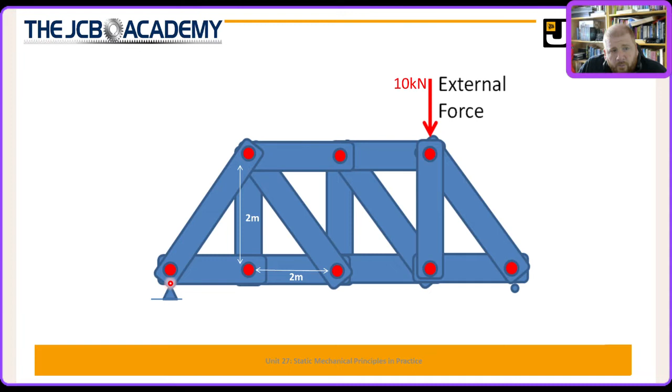Because we have a pin joint here, this part of the truss can't move horizontally or vertically. Therefore, there are two reaction forces: one in the horizontal direction, R1x, and one in the vertical direction, R1y.

However, at this end of the truss, it's a roller bearing. It can move horizontally, but it's being supported vertically. Therefore, there's only one reaction force at that end, which is R2 in the y direction.

These reaction forces are the first thing we have to calculate. These three reaction forces are the first things we have to calculate before we can go into any more detailed truss analysis. So we're going to move on and look at how we do this.

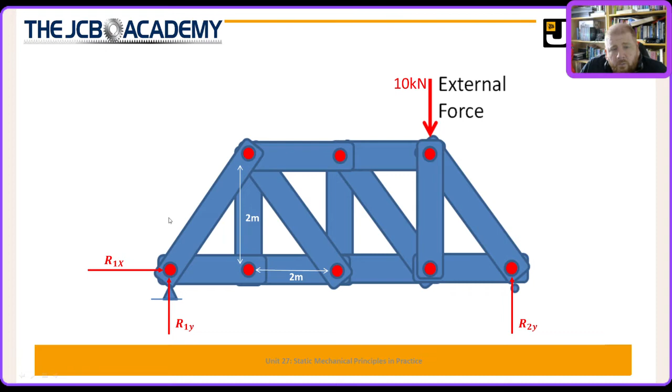The simplest way is to now take the whole truss as one solid object. I've kept the vague shape of it - that's what we tend to do when we do this.

Put the dimensions on. So there are 4 beams horizontally between this end and this end, so 4 times 2 meters is 8 meters. And there are 3 beams from this end to where the 10 kilonewton force is acting, so that is 6 meters from this end.

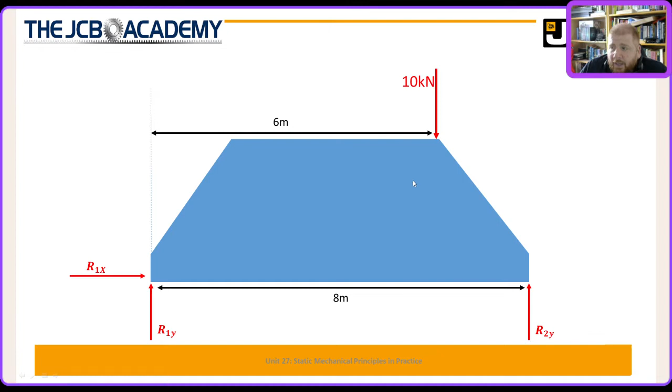So now we've got our measures, what we're going to do is look at our 3 equations of equilibrium. Statics is all about things not moving. So if we look, put our reaction forces in, we're now going to equate these forces and see how we go.

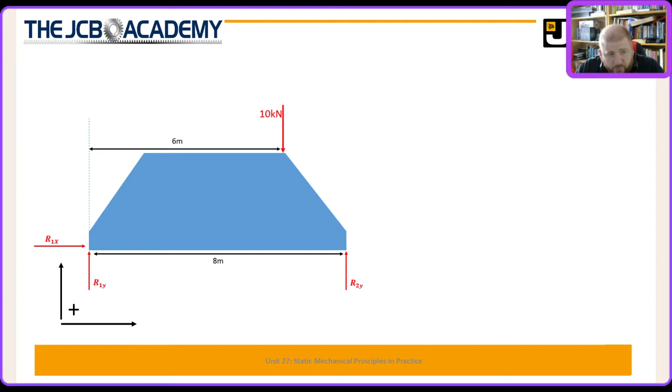So when equating forces, we need a convention for our signs. I tend to always take my sign convention as being up is positive and right is positive. That ties in with how we draw a graph in England especially - that top right quadrant of a graph is our positive quadrant.

The other thing I also do, which I've not drawn on here but is a convention I use, is that anti-clockwise moments are positive. That comes from my background in robotics.

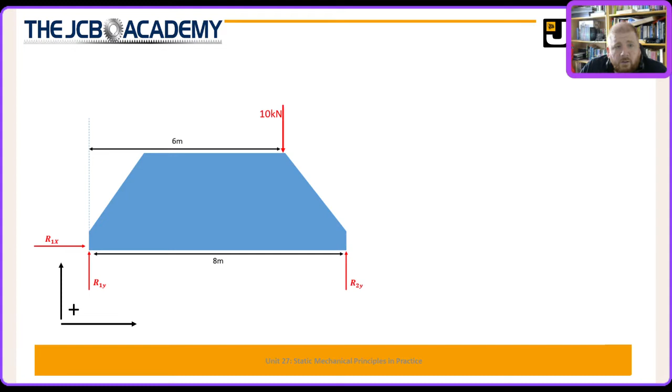So if we look, there are 3 formulae that we need to remember when we're calculating statics: the sum of all horizontal forces, sigma Fx, is equal to 0, and the sum of all vertical forces, sum of Fy, is equal to 0.

If we look at our horizontal forces, we'll just sort this out now. We have one horizontal force here, R1x, and no other horizontal forces. If this external force were acting at an angle, it may create a horizontal force, meaning we get a horizontal reaction force. But in this example, R1x is pushing to the right, and there are no other forces pushing to the left, so R1x is equal to 0.

And you should, if you're doing the BTEC level 3, expect this to be the case. It's a very, very harsh centre that would ever give you something where R1x equals anything but 0.

Back to where I was. The sum of forces in the y direction is also equal to 0, with up as positive. That means R1y and R2y must balance a 10 kilonewton force pressing down. So R1y plus R2y minus 10k equals 0, which simplifies to R1y plus R2y equals 10k. There's nothing else we can do with that yet, because we don't know what R1y or R2y is.

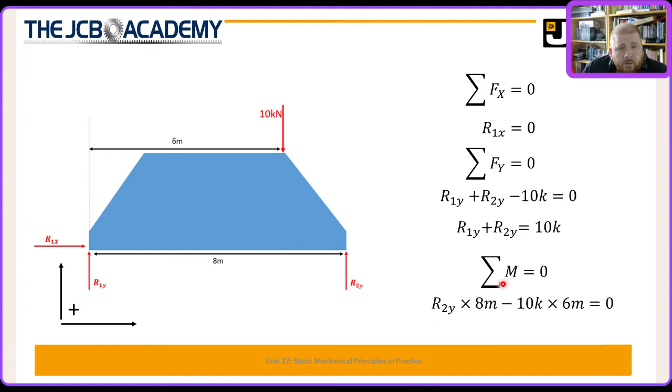What we've got is R2y multiplied by 8 meters from our pivot point, minus 10k, because it's trying to turn it. R2 is turning it anti-clockwise, so it's positive, and the 10k force is turning it clockwise, so it's negative. So R2y times 8 meters minus 10k multiplied by 6 meters is equal to 0, because all of our forces equal 0.

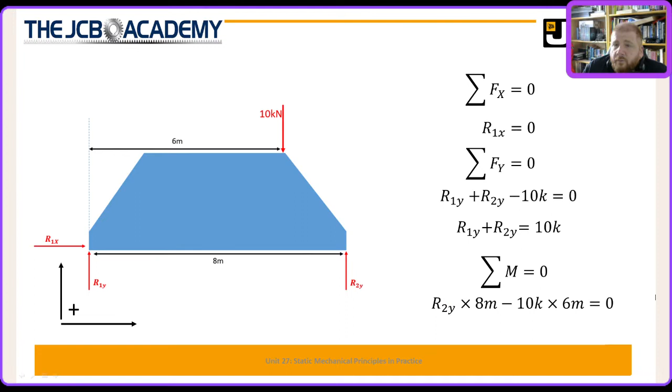Happy with that so far. What we'll see now is we'll take these two forces, and we're going to take this bottom equation here.

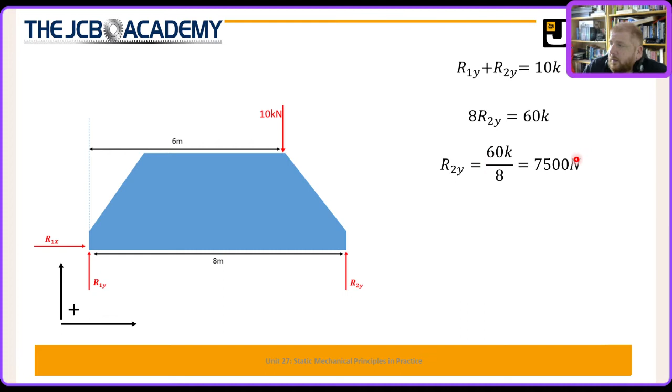8 times R2y is equal to 60k. Hopefully that's a simple rearrangement for you guys: R2y is 60k divided by 8, which is 7,500 newtons, or 7.5 kilonewtons.

If we then take that 7.5 kilonewtons and put it back into the first equation, we see that R1y plus R2y is 10k. R1y plus 7,500 is 10k, which means R1y is 10k minus 7.5k, giving us 2.5 kilonewtons. That gives us our reaction forces for this truss.

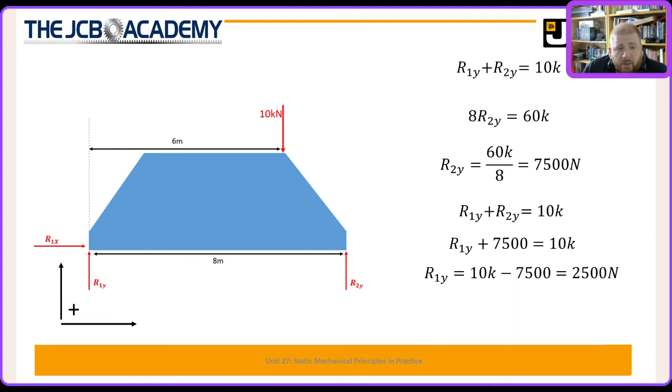So we can draw the truss with its reaction forces sitting there. Those reaction forces are calculated exactly the same way as you would for a simply supported beam.

Now we've got 8 different joints to analyse, with 13 beams, which means there's going to be 8 different sets of 2 equations for each joint, sorry, not beam.

So what we're going to do to simplify is to label our joints. Personally, I tend to start at one point and go clockwise, but you're free to label them how you want. I start in the bottom left with A, and then just label them all the way around to H in a clockwise motion. That's done, so now we know what the joints are called.

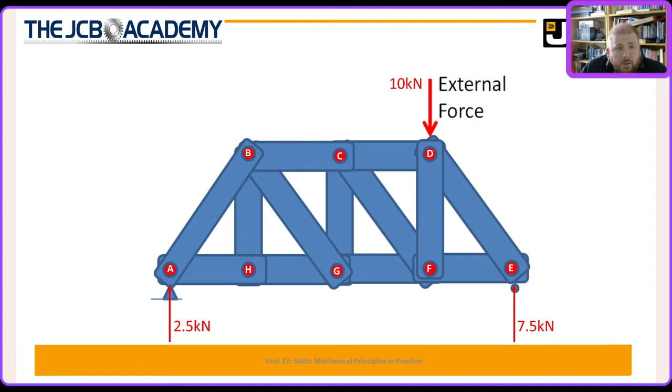We're going to add the forces. To do this, I've slightly redrawn the truss a bit bigger. This diagram was one I drew a few years ago and didn't allow an awful lot of modification. This version is a bit more user friendly, shall we say. So here's my truss, exactly the same design, just slightly bigger, easier for us to see.

We're going to take the beams out of the diagram and replace them with tensile forces, assuming every force is tensile. Now when we look at that, we take the force between point A and point B. We're going to remove that beam and add an inward pointing force we've called AB. So a tensile force on that beam creates an internal pull at joint A.

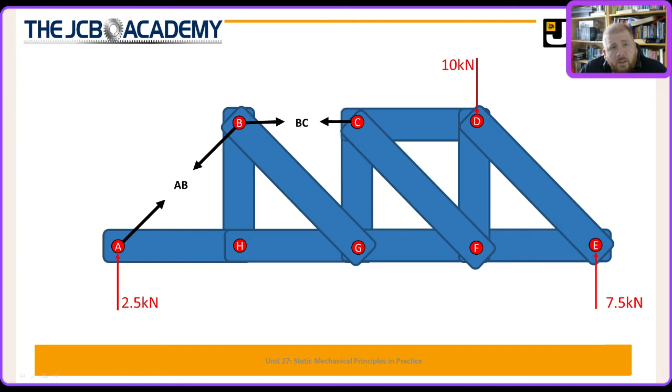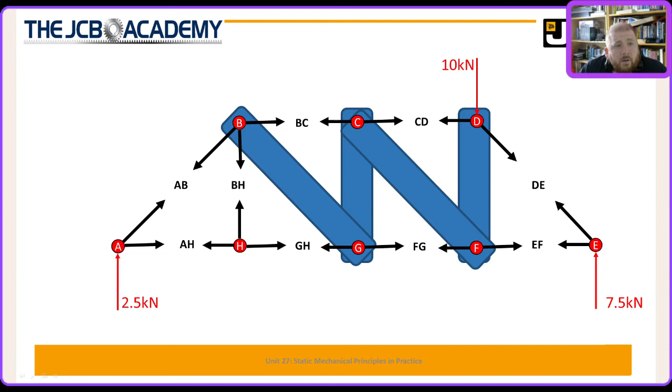And we just go around again and do exactly the same thing. So we replace BC, CD, DE, EF, FG, and so on, all the way around until we have a still very complicated looking free body diagram. And it's at this point you have all freedom. We're going to pick a joint, ignore absolutely everything else within that truss, and use that point to determine the forces acting on it. But there is one rule.

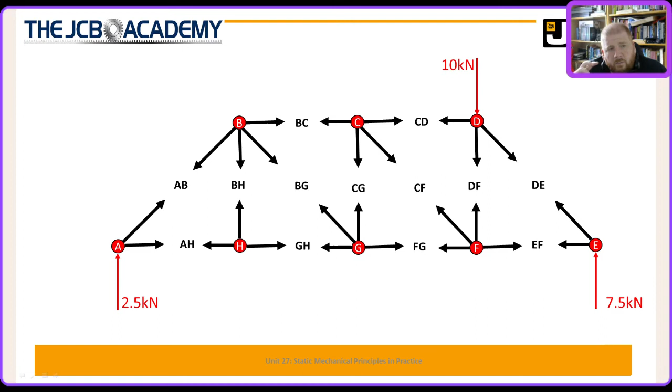We have two equations per joint: the forces acting horizontally and the forces acting vertically. So if we have more than two unknowns, we would need more than two equations. So we can only use the method of joints where we know all but two of the forces acting on a joint.

For instance, if we look here at point B, it has got AB, BH, BC and BG all acting upon it, and we don't currently know what any of them are, so we can't start at point B.

If we look at point E, we have a 7.5 kilonewton reaction force, force DE, and force EF. There's two unknown forces, so we could use point E. However, I look at point A, and point A is in the same situation: 2.5 kilonewton reaction force, force AB and force AH.

When we're doing our calculations, we're going to use the same conventions all the time, and I'll bring that up in a minute. If our forces become negative, the easiest way is to use the name of the force, rearrange the equation, and then put the forces in, because then we don't lose minus signs. It will make sense in a moment as we go through this.

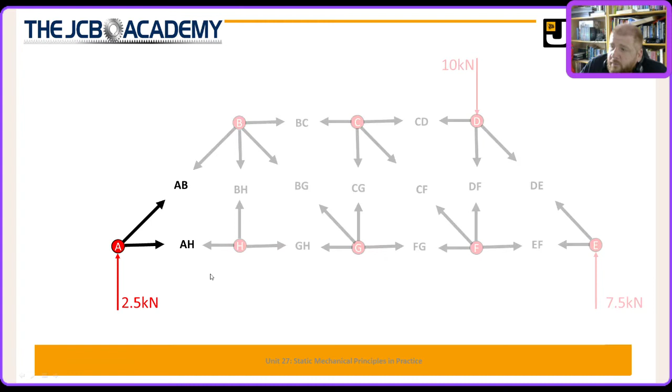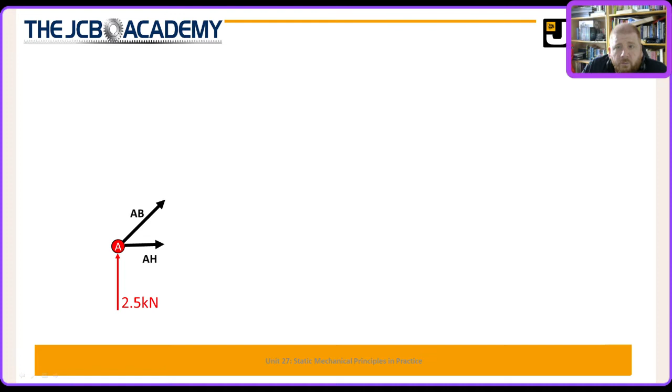So we're going to pick point A first. I'm going to get rid of everything else and bring up my free body diagram, and this is all we would sketch. Point A is an individual point force. Now let's add in our sign convention, which will be there in a moment. There it is. Now we're going to equate horizontal forces, then equate vertical forces.

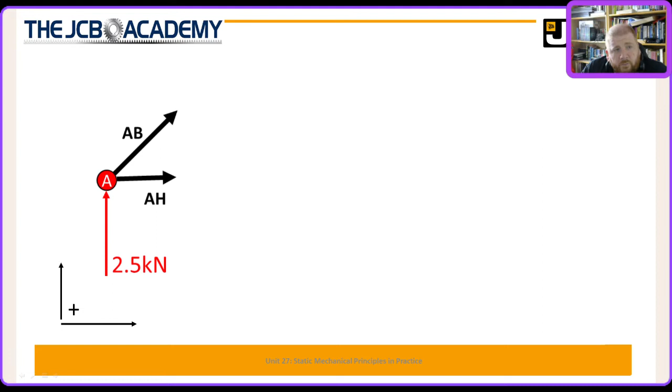So, sum of forces in the x direction is equal to 0. This is how I tend to do it on a page as well: you'll see I'll have split my page down the middle, done x, and I'll do y in this part of the screen here. You'll see it in a moment.

So if we look at this, sum of forces in the x direction: we have got force AH, which is horizontal and pointing to the right. We also have the horizontal component of force AB, which is acting at 45 degrees to the horizontal. If we remember our rules of right angled triangles, then the horizontal component of a force is the hypotenuse multiplied by the cosine of the angle.

The vertical component of the force is the hypotenuse multiplied by the sine of the angle. Those are two rules that are very important to remember for this analysis, they'll come up all the time. Again, we can't do anything here because we don't know what AB is, we don't know what AH is. We've got two unknowns, we've got one equation.

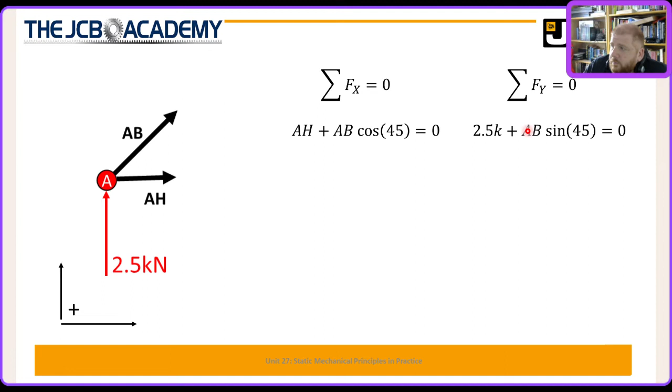However, if we look at the vertical forces, sum of the forces in the y direction: 2.5 kilonewtons is pointing upwards here, plus the vertical component of AB, which is also pointing upwards, so it's positive, which is AB times the sine of 45, is equal to 0.

Now we've got one unknown in this equation, so we keep working. We rearrange this, we get that AB times sine 45 is minus 2,500, and AB is minus 2,500 over sine 45, which gives us our first force. Force AB is minus 3.54 kilonewtons. Minus because this is not a tensile force, this is a compressive force. That's what that minus sign means. But for the purposes of our calculation right now, we're just going to put minus 3.54 into our table of results. We'll worry about what's compressive and tensile at the end.

Bringing it back to our forces in the x direction, we now know what AB is: AB is minus 3.54 kilonewtons. Therefore AH is minus AB cos 45, and so AH is minus minus 3.54k cos 45. This is why it's important to get this sign right before we put our numbers in, because minus minus gives us plus 2.5 kilonewtons for our force AH.

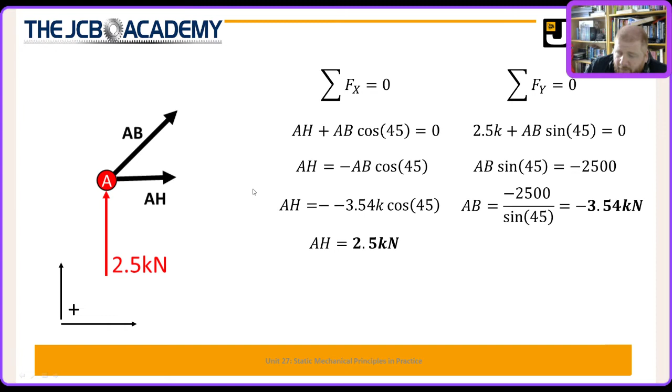Going to our truss, those are those two forces calculated, so we can go back to our truss, and again this is how I would be doing it for you guys. Have the truss drawn out, get yourselves a table of results. So we've now got AB and AH. You'll note these are all the forces that I'm expecting to see within this truss, and I've worked two of them out already. If you want, you can then rub out AB and replace that with the force value.

I'm doing this purely so you can see how we build up these forces. Generally I would just leave the table at the end, it's up to you. Okay, so now we've got to work out which one we're going to do next.

If we look at point B, we still have three unknown forces. Point E we could do, but it doesn't really get us anywhere. However, if we do point H, then we clear this force out on point B and we're left with two. So the principle is: do point A, then go to point H, up to point B, and we should then be able to step ourselves up - diagonally down, up, diagonally down, up, and back down. So we're going to do point H next.

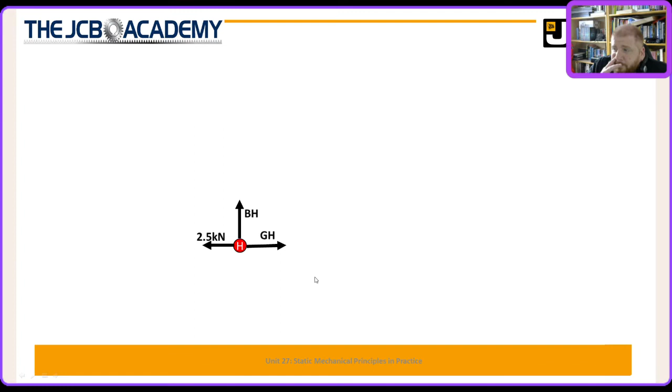So let's have a look at point H. Bring those forces in, just for us so we can see what's going on. And don't forget my sign convention - I'll start not putting that sign convention on the slides in a bit.

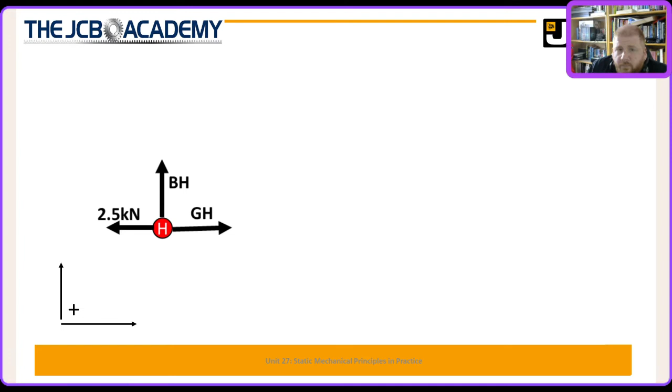Sum of forces in the x direction is equal to 0. GH is positive due to our convention down here. AH is negative due to our convention down here - this is AH, remember, our 2.5 kilonewton force. So GH is equal to AH, which means GH is also equal to 2.5 kilonewtons. Nice, quick calculation.

Those bright sparks might be looking at BH thinking, I know what that is. This is what we call a zero force member. If you see two forces directly opposing each other and then a third force at 90 degrees to it, then you know that is a zero force member.

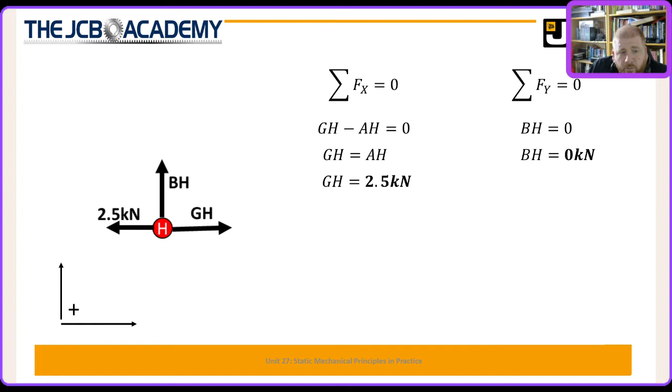BH is upwards and positive. There are no other vertical forces in this member at this point. Therefore, BH is equal to 0 kilonewtons - what we call a zero force member. So point H is nice and quick.

Done. We can come in, replace BH and GH with their forces, and again, I'm going to replace them on the diagram. We can't exactly delete that member off the diagram - even though it's 0 kilonewtons, we can't delete it because the member is there. So we've got to acknowledge it's there, but we call it a zero force member. For instance, if BC were to break, then this would start taking some force, probably.

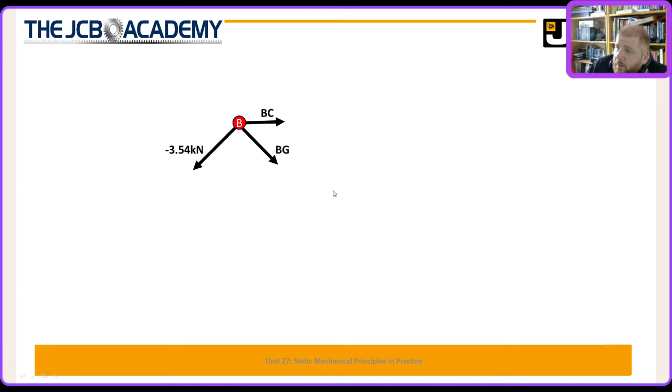So we've done H, we've done A, got 4 forces already. Now if we look at point B, we know what this force is, we know what this force is, and we're left with 2 unknown forces. So I'm going to do point B next, work our way through it. Just simplify our diagram a little bit.

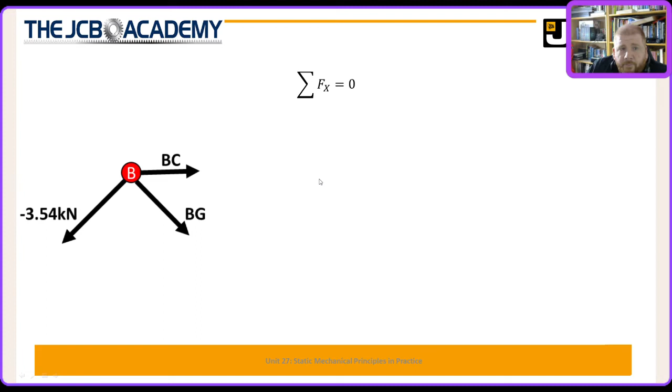Sum of forces in the X direction - and again, here's where we're going to get slightly bogged down with signs. BC horizontal, pointing to the right, positive, plus the horizontal component of BG, which is BG cos 45, also horizontal and pointing to the right, minus, because it's going to be pointing to the left, the horizontal component of AB, which is our minus 3.54 kilonewtons from our previous calculation. So we have to look at this, rearrange this - yeah, there's nothing we can do because we've still got 2 unknowns.

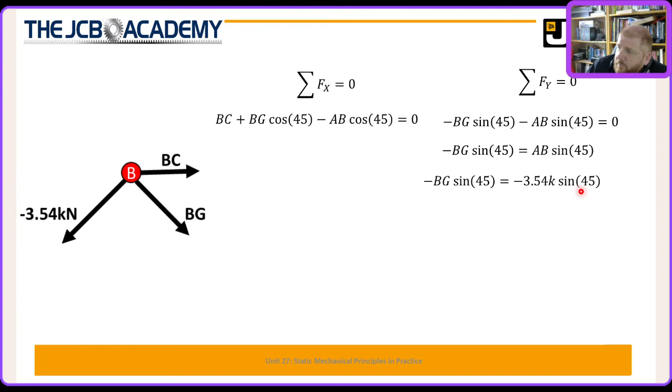So we have to come back to our vertical forces again, Fy. You can see that minus BG sine 45, vertical component of BG, minus - because these forces are pointing down, that's why they're negative - so minus BG sine 45 minus AB sine 45 is equal to 0. That means minus BG sine 45 is equal to AB sine 45. Minus BG sine 45 is equal to minus 3.54, that's our AB sine 45. Minus BG is minus 3.54 kilonewtons, so BG is 3.54 kilonewtons.

Lots of minuses in this one, be careful. This is a tensile force, however it is of equal and opposite magnitude to AB.

Now we know BG and we know AB, we can plug our values in here, and again watch out for this minus - okay, that will become a plus. So BC plus 3.54 cos 45 plus 3.54 cos 45. BC plus 2.5k plus 2.5k. BC is minus 5 kilonewtons. You will be a marvel at right angled triangles by the time we finish this truss.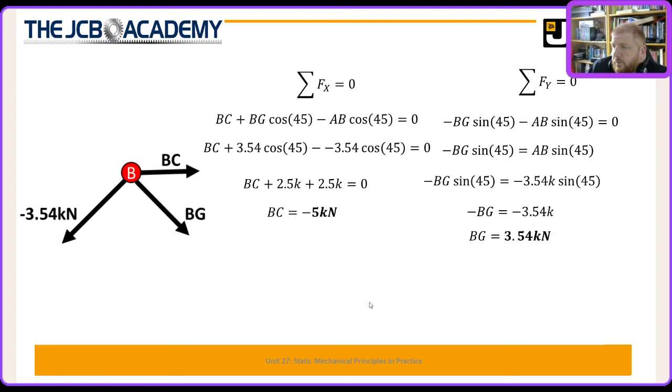So we've now got what BG is, we've got BC's. You'll note I just even deleted BH - there was no force there, so I just took it off to make the diagram easier. We can do that bit on our single point force, we can't do it on the overall truss. And so we're back here - we've now got BC, and we've got BG.

BG is 3.54 kilonewtons, BC is minus 5 kilonewtons. So we're basically halfway through this truss already, nearly. 1, 2, 3, 4, 5, 6, 7 more to work out. We've worked out 1, 2, 3, 4, 5, 6, we've got 7 more to work out.

So again, we're going to look, and point C still has 3 unknown forces on it. But point G, we know this force, we know this force, and we've got 2 unknown ones. Therefore, we're going to do point G next. So let's have a look at point G.

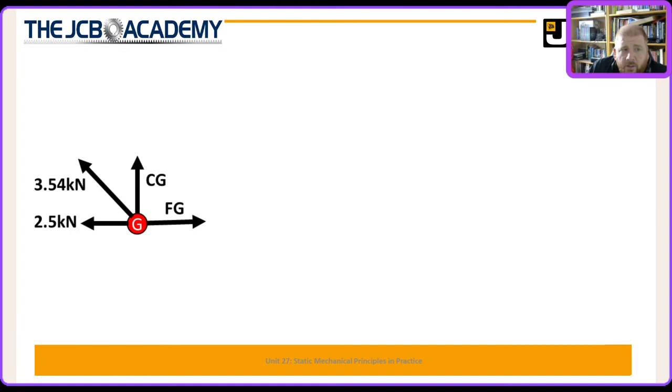Let that come in. We're keeping the same convention, so I've not bothered reiterating it. Sum of forces in the x direction. FG is positive and pointing to the right. 2.5 kilonewtons, that is GH, pointing to the left, so that will be negative. And we'll have the horizontal component of our 3.54 kilonewton BG force here. So we've got FG minus GH minus BG cos 45 is 0.

Plug our numbers in there. 3.54 cos 45 is 2.5 kilonewtons. FG minus 2.5k minus 2.5k is 0. So FG is 5 kilonewtons.

Sum of forces in the y direction. Vertical pointing upwards, CG, so it's positive here. Vertical component of 3.54 kilonewtons on BG is BG sine 45. So CG plus 3.54k sine 45 is 0. 3.54k sine 45 is 2.5k. You may be noticing that cos 45 and sine 45 are the same value. So CG is minus 2.5 kilonewtons.

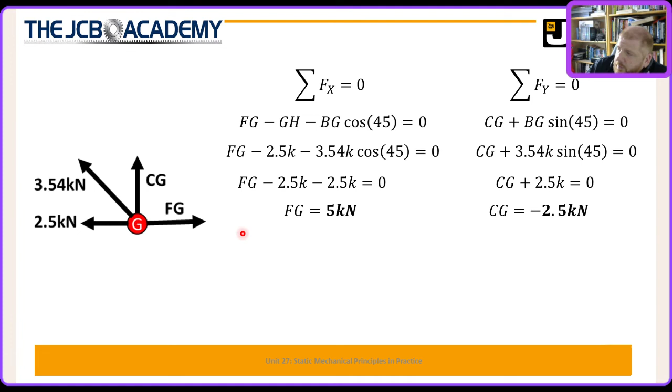So we've got CG and we've got FG from that calculation. Again, now we pop back to our truss, pop those values in the required slots, and I'm just going to replace the forces as we have done already. Okay, so now I'm going to go up, keeping this going, up to point C, where we know 2 of the forces, we don't know the other 2.

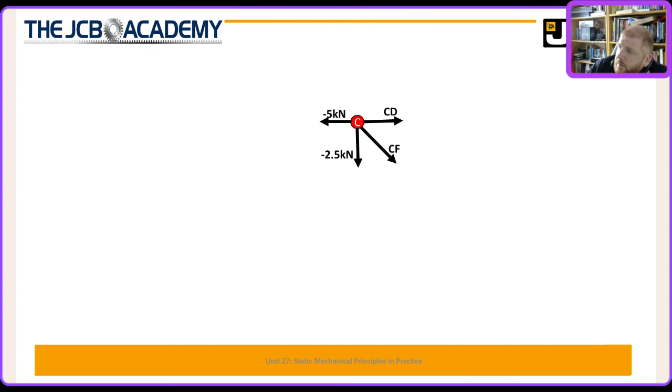So let's focus on this one. Again, this one's slightly tricky, but it's not too horrendous. Forces in the x direction, once again. So we've got CD, horizontal, pointing to the right.

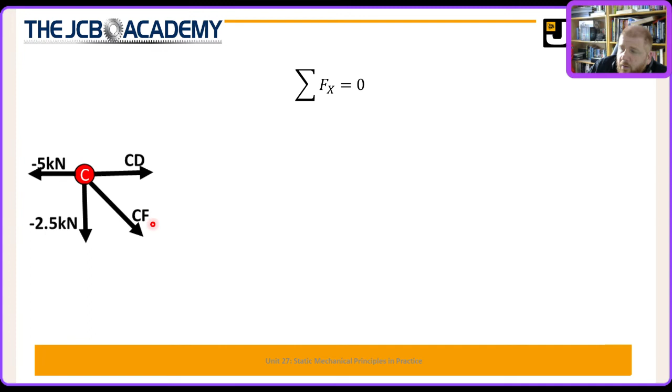We've got what's that one? BC, minus 5 kilonewtons, horizontal, pointing to the left. And we've got the horizontal component of CF, which will also be pointing to the right. So I get CD plus CF times cos of 45, minus 5k because it's pointing behind us and is minus 5 kilonewtons. Again, we can't do anything with that because we don't know what CF is and we don't know what CD is yet.

So we need to go to our vertical forces. Both are pointing down, so we get minus CG, which is this minus 2.5 kilonewton force, minus the vertical component in CF because it's pointing downwards. We have to go to the right and then down to get to this point. So we've got minus CG minus CF sine 45. That means minus minus 2.5 kilonewtons is equal to CF sine 45. Plus 2.5 kilonewtons over sine 45 is CF, and that is 3.54 kilonewtons.

Now we have CF. We come into this bank here, put our numbers in. You'll note I've taken here, I've taken my minus and minus and made it a plus. 3.54 kilonewtons, which we've just calculated here. Rearrange that, and we get that CD plus 2.5k plus 5k is 0, so CD is minus 7.5 kilonewtons.

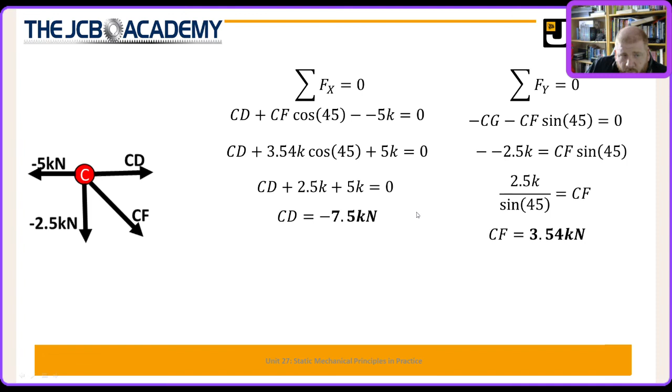Next two forces done. So we go back and we plug those in, and you start seeing, oh, we've only got 3 forces left to get. Looking at my table, pop those forces in: DF, DE and EF.

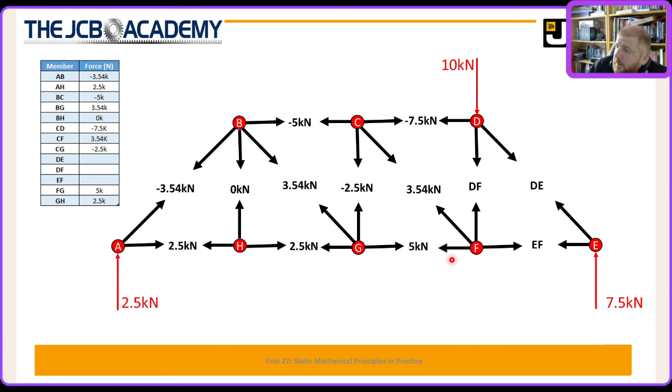So if I go to point F, that's going to get 2 of these forces. I could do point D, but actually I'm thinking point F is probably slightly easier. There's less negative forces on it, is what I'm looking at. So we're going to look at point F, keep that trend going. Put in our real forces, focusing on point F, across again.

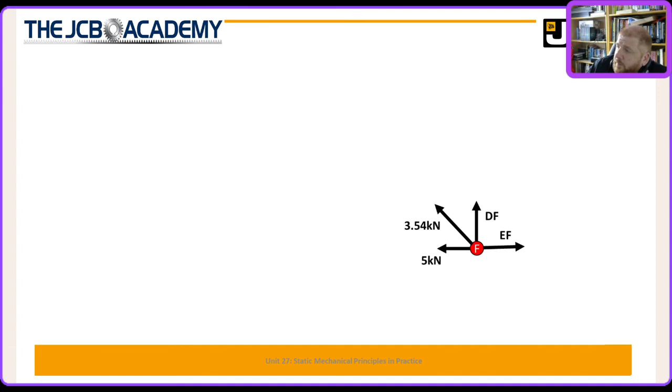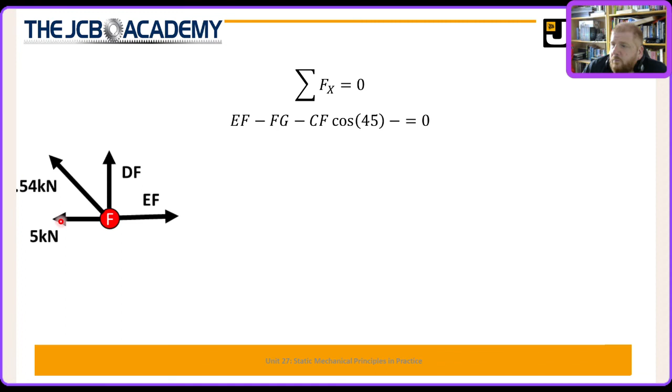It's just gone slightly off the screen, but you know it's a 3.54 kilonewton force. So sum of forces in the x direction is 0. EF, horizontal, pointing to the right, minus FG, which is my 5 kilonewton force, pointing to the left, so it's negative, minus the horizontal component of CF, which is CF cos 45.

Again, do we know all of these numbers? Yes, so we can put them in. If we don't know all the numbers, we go on to the vertical component, and that will give us one more of the forces. Looking at this, EF minus 5k minus 3.54k cos 45 is EF minus 5k minus 2.5k. EF is 7.5 kilonewtons tensile force.

Vertical component, DF vertical, pointing directly upwards, plus the vertical component of CF, which is CF sine 45, is equal to 0. So DF is minus CF sine 45, which is minus 3.54 kilonewtons times sine 45. DF is minus 2.5 kilonewtons.

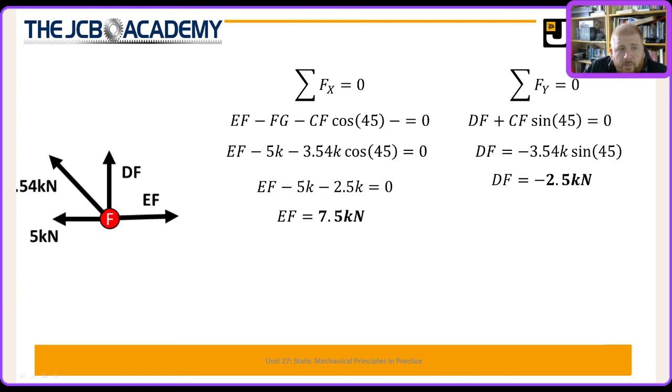So we've worked our way through to those two forces. Very quick calculations at this point, because we know where we're going, we know what we're doing. Everything's right angle triangles. Those two forces drop in, and we're left just with DE.

Okay, so put those forces in, and what you'll find is, and this should happen with any truss you analyse, we've now got 2 points on our truss that we haven't analysed, but we've only got one more force to find. You don't have to do this, so I'm not going to go through it on this video, because this is more making sure we pass this.

The level 3 assignment, making sure you can follow how to do the method of joints. We could pick, say, point E to work out what DE is, but then work out all the forces on point D and see if we get the same value, and it gives us a small little error check. But we're now going to look at point E.

I've picked point E purely because if we look, point E's external force is pointing upwards, and so it's going to be positive, whereas point D's external force is pointing downwards, and we've got a negative force here, a negative force here, a negative force here, and it's just more confusing, to be brutally honest. So I've picked point E.

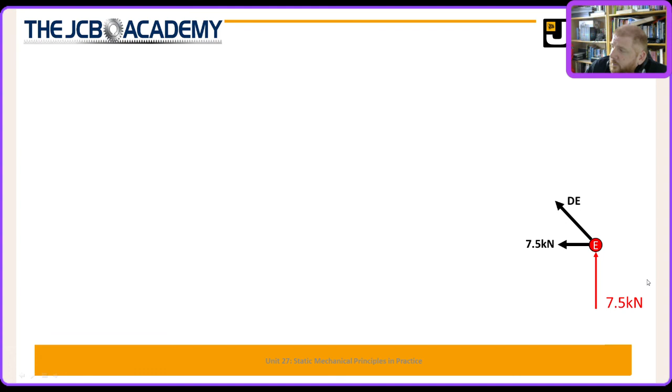So we'll simplify that down, bring it along here a bit, and we're going to look at horizontal forces. Minus EF, because it's horizontal pointing to the left, minus the horizontal component of DE, because it is also pointing to the left, is equal to 0 because all the forces are equal to 0.

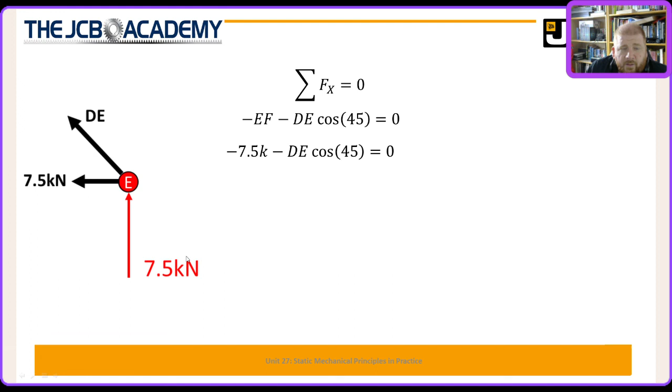We know what EF is, so minus 7.5 kilonewtons plus DE cos 45 is 0. Sorry, minus DE cos 45 is 0. So DE is minus 7.5 divided by cos 45, and that is equal to minus 10.6 kilonewtons.

We can check that because we can also do the sum of forces in the y direction is equal to 0. 7.5k plus DE sine 45, the vertical component of DE, is equal to 0. So DE sine 45 is equal to minus 7.5k, and you'll see we've got basically the same calculation. It gives us the same answer.

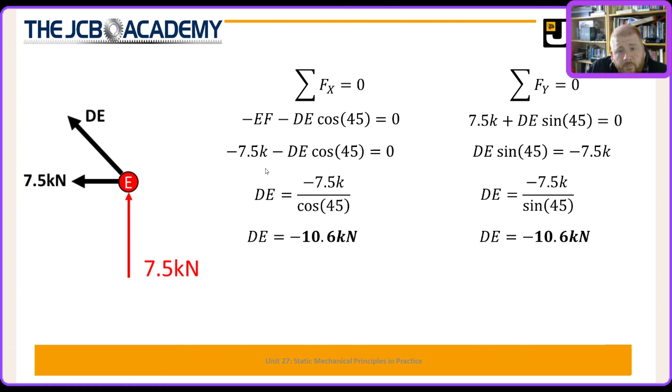So we can be pretty confident that that is right. Pop to our truss, put our final force in, and we have calculated all of the forces within that truss using the method of joints system. There's one more task we need to do on the BTEC.

Is we need to identify which forces are compressive, which forces are tensile. While our minus signs do that because we assumed everything was tensile, for me it's always better to make it clear at the end. So what I do, and what I've done here, you can draw this yourselves.

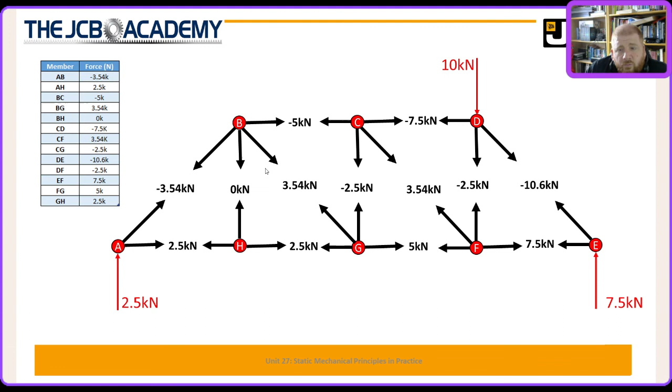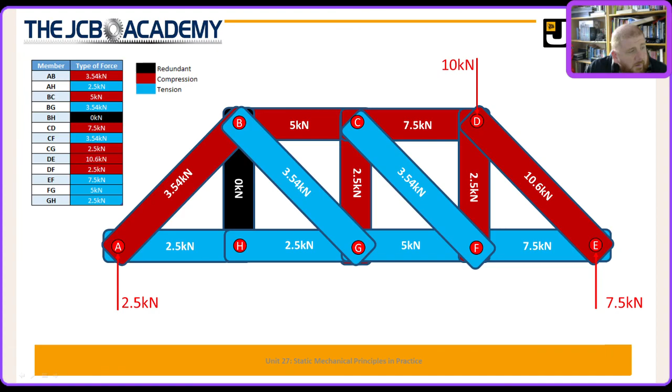Okay, I hope this has been useful for you. I know it can be a long-winded job doing this analysis. There is software out there that does it for you. Once you're in the business, you're not likely to be having to do these hand calculations yourself. Excel can be programmed to do it for you as well.